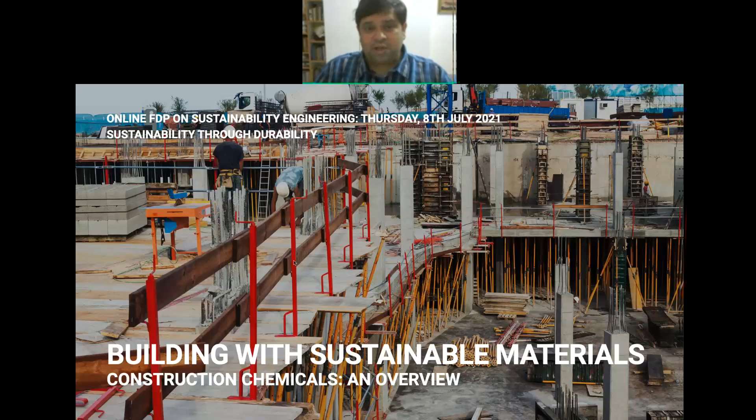Today what we will be discussing is about construction chemicals and the construction chemical industry as a whole. Because what generally our industry brings to the industry is a lot of durability, and through that durability, what comes through as an end product is sustainability. So we'll talk a lot about these concepts.

Here's my card, just in case you want to take a screenshot to contact me. Basically, I am a civil engineer, concrete technologist by profession, but for the last about 15 years I've been mostly in this line of construction chemicals, and I've seen and worked through it inside out. So hopefully I should be able to give you a holistic overview of the industry as a whole.

Going on the agenda today, I'll introduce to you what construction chemicals are, what we are about, how we add value, and so on. After that, we'll talk a little about the solutions itself - the different products and product systems, what you can do with it, and the possibilities you can apply as part of your research or as part of the solutions you offer.

So what are the solutions? I'll go very quickly through some detailing. Our industry is an expert not only in making materials, but also in telling you how to use it, how to re-engineer your structures, and how something should be applied to get the maximum life or maximum benefit out of it. So detailing is very, very important. And after that, we shall be finally concluding.

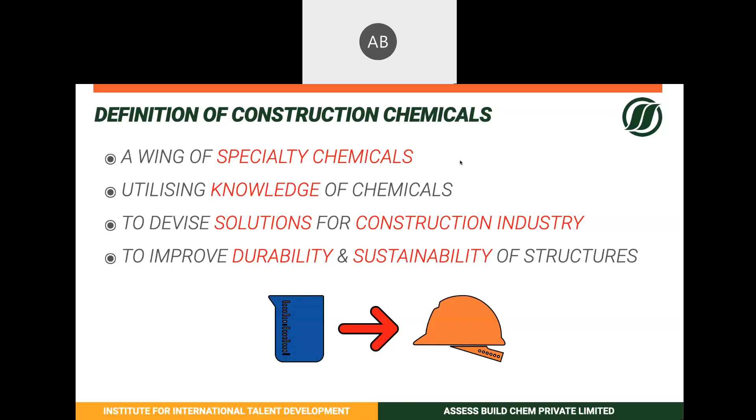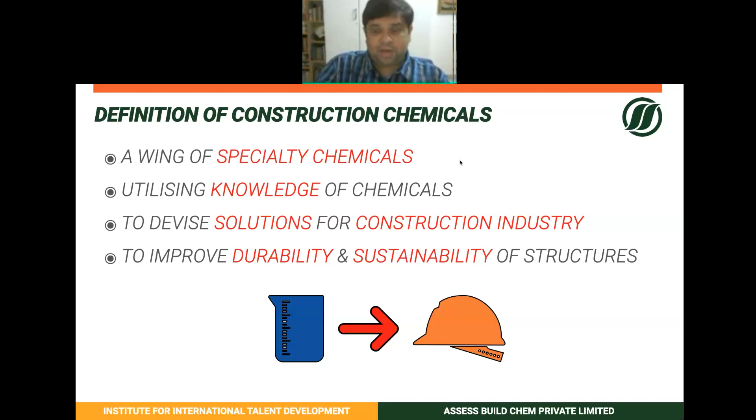Okay, so by definition, we are a wing of specialty chemicals. That means we basically come from the chemical industry, whereby we utilize the knowledge of chemicals and then devise solutions for the construction industry. So the aim of our industry is to improve the durability and sustainability of the built structure. So our expertise basically comes into three basic categories.

If we take the entire range of what construction chemicals offers, we can break it down into three broad areas. The first, of course, is concrete enhancement. This means there are additives and different kinds of materials available to make the initial concrete construction much better. How do you enhance the properties of concrete? How do you make it easier to flow, easier to place, compact, and cure? How do you improve the properties of various concretes? That's what comes under concrete enhancement.

Then under concrete repair - for example, if your concrete is damaged because people didn't use the first part, our concrete enhancement solutions, and the concrete undergoes rapid deterioration - to repair that kind of deterioration we offer different kinds of mortars, different kinds of supplementary binders, or different kinds of strengthening systems like epoxies, injection systems. So we also offer those special materials for repairing the concrete and restoring it to its original condition.

And once these two steps are over, we also provide solutions to protect the concrete in the long run. That is basically how a concrete structure will attain its value, because only once you protect your concrete properly can you assure that it's going to actually live through its design life, or have a long life, thereby generating sustainability and value for different structures.

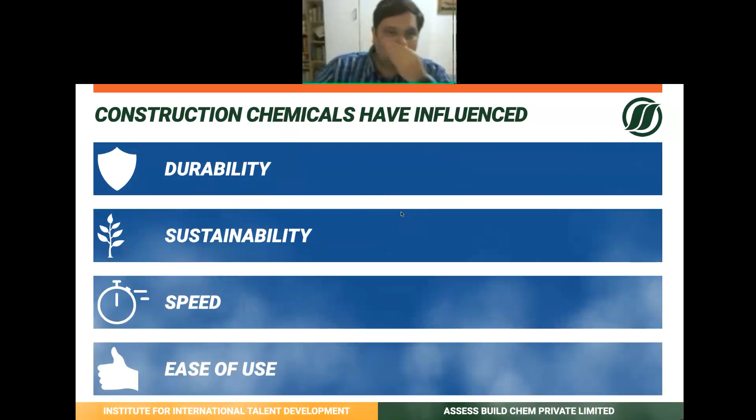If we think about it in the long run, construction chemicals have basically influenced the durability of structures. A lot of times in the construction industry, or even when talking to slightly senior engineers, they talk a lot about durability, and the discussion comes up that whatever we built in olden times, like our forts or ancient structures, look, they have survived for thousands of years. Then why not concrete?

That is something we need to really start thinking about, because over time construction has become much faster. Space is a constraint, so we have stopped thinking of expansive structures horizontally. We are now thinking vertically. So the construction systems have changed, and with all those things have come newer challenges. How to make concrete more durable for everyday application is something the construction chemical industry really works on in the long term.

The sustainability part of it also comes through very easily, or construction chemicals influence sustainability. That is because by proper use of construction chemicals, one is that you reduce the OPC content, or rather optimize the OPC content. Your structures last much longer, so you don't need to repair and rehabilitate them as frequently. So you're not spending time, money, fuel, and manpower to do that. That's how it starts bringing sustainability into it.

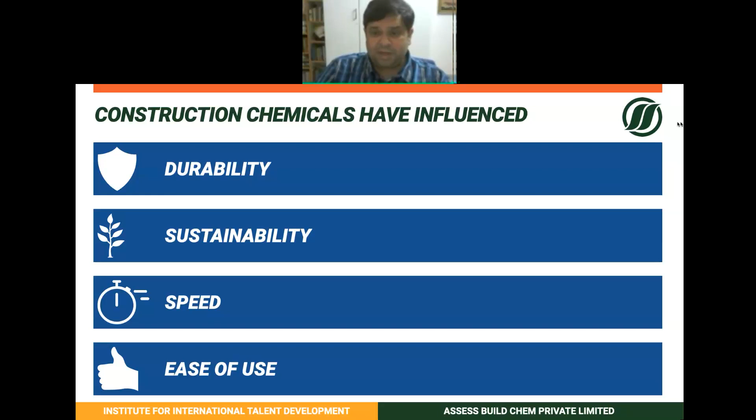Efficiency is of course one of them. It's because you're optimizing the use of different materials. So your construction overall becomes much more efficient in terms of time, in terms of the materials used, but basically in terms of the life cycle costing.

That apart, of course, the use of construction chemicals is a tremendous boost to strength. For example, your concretes today are becoming much more stronger and much more durable. And this kind of evolution has become possible only because of concrete admixtures and because of construction chemicals.

Now aesthetics is something that it also aids. For example, there are different sorts of finishes available today. When those things come from the construction chemical industry, the concrete itself becomes much more beautiful, for example form finished concrete, or exposed aggregate finishes. All these kinds of things become possible only by use of construction chemicals.

Of course, since the structures are much better and much more durable, construction chemicals really help with safety. That means there is less chance of damage, less chance of collapses, and it really improves the life. So it improves safety over a long time.

Value, of course, improves tremendously, improves the lifespan of buildings, and therefore improves the life cycle economy of structures. And last but not least, energy conservation. For example, today there are coatings available which we call thermal coatings. These coatings can reduce the amount of energy used during the life cycle of the building by almost 30%.

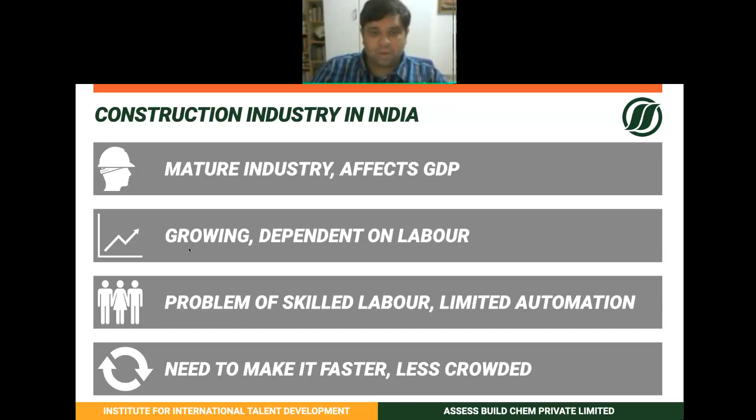To achieve economy, we need to make construction much faster, and now, keeping the pandemic in mind, we need to make construction less crowded. This is the situation today—however much we like it, we will need to maintain distancing over time.

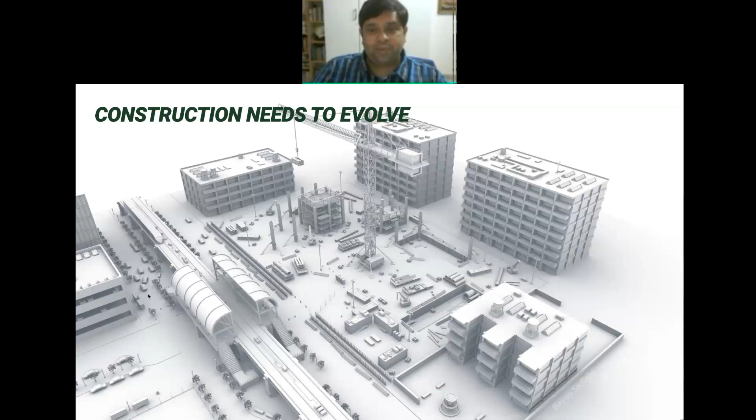Because of that, construction will need to evolve. It will need to become much faster, and it will need to maintain sufficient distance between two people. Basically, it will have to optimize the number of people employed—people cannot be working very closely together anymore. We'll need to rethink the way we're constructing and working, and make construction much more efficient and much more skilled. But at the same time, this is something we will have to keep working on.

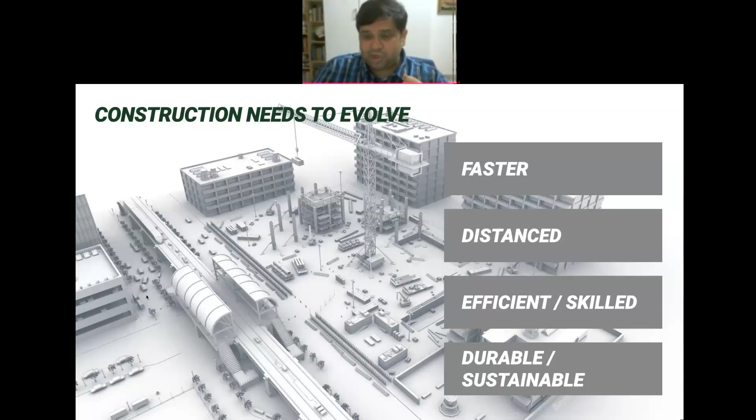Since manpower will remain a constraint in the near future, we will have to make construction a lot more durable and sustainable. Without that, structures simply won't last long, and if they don't last long, we'll have to again get people and allocate resources to repair it. So our structures need to be durable and sustainable from the word go. We need to start thinking about building better and faster, and this is going to be possible only by use of construction chemicals. So now a lot of people ask me about construction chemicals.

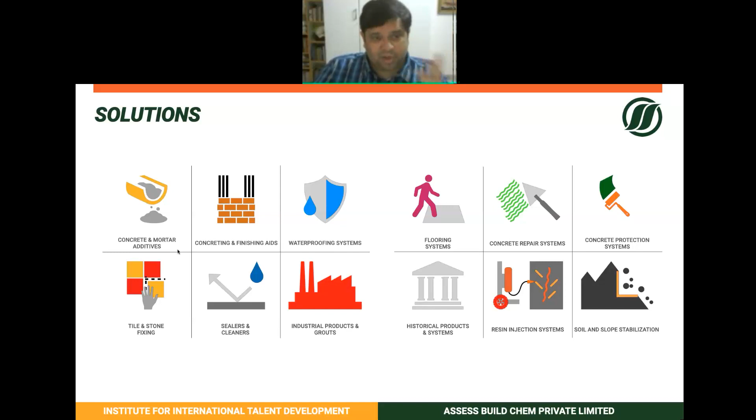If I generally ask today's cross section of the people who are attending, what do you know about construction chemicals? Most people will simply think that construction chemicals means concrete and mortar additives, like all different admixtures are construction chemicals. Yes, partly you're right, because the technology did evolve from the concrete and mortar additives. But that apart, today construction chemicals has ventured into different concreting and finishing aids. That means things like mold release agents, curing compounds, plasters and different kinds of mortars.

Then another area that most people associate us with is waterproofing systems. Of course, anything that is used to protect water from coming into your house, your building or your infrastructure is something that we normally work with. Then there are other factors which are much more architectural, for example tile and stone fixing, or different kinds of sealers and cleaners to maintain your concrete facade, or to maintain marble, granite, natural stones and things like that.

Then we also work a lot with industrial products. So what does industrial products mean? These are specialty materials that are used to anchor machinery bases. These are special materials that are used to protect industrial metal sheds, for example. Again, systems relating to industrial are floorings. Any different kind of floor, whether it's a commercial, industrial or residential building, a lot of the flooring systems come from the construction chemical industry.

That apart, of course, we are into repairing concrete. So there are a lot of special materials here, like premixed mortars. You have your anti-corrosion coatings, your micro concretes, rust converters, corrosion protection systems, a lot of those different kinds of materials, injection systems, and so on.

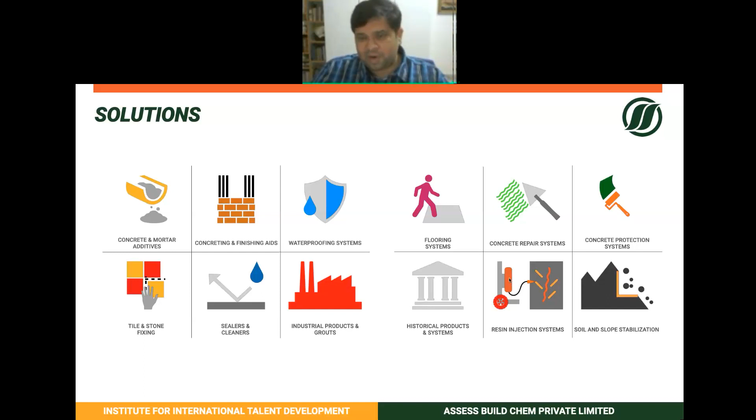There are a lot of things available. There's a whole new class of material called resins. Resins might be anything based on acrylics, polyurethanes, epoxies. I'm sure you would have heard all these terms before. A lot of these systems are today put into use for waterproofing, for repairs, for soil and slope stabilization. They're all kind of interconnected, but at the same time, we break them down into these different solutions. The aim of using all these different materials is to ensure that we get sustainable construction.

A lot of people talk about sustainability in very large terms, and we are using this term very interchangeably these days. But I've read through a lot of these things, and a simple way for me to put it is: sustainable construction is something that simply reduces the environmental impact or the financial impact over the life cycle of the structure.

By environmental impact, we mean that if we are using less cement, we are already reducing the carbon footprint. If we don't keep on repairing the structure, we're using less fuel, less manpower, and also less cement and all those things. So all these really go towards helping the environmental impact of the materials. And of course, if your structures last longer and are much more durable, then they also improve your financial impact over the life cycle of the structure.

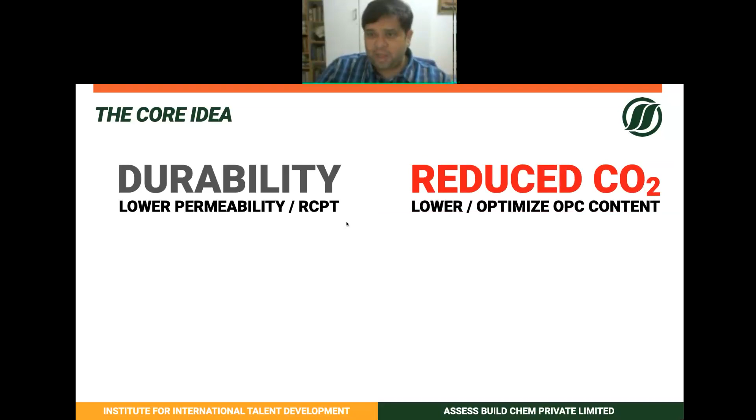So the core idea that we have to follow is how we can improve durability, how we can improve the carbon footprint, that means reduce the CO2 that goes to the environment. The third is save cost, and the fourth is to save energy. All these four core ideas can be put into place by judicious use of construction chemicals.

So right now, what I'm going to do is, over the next roughly 30, 40 or 50 slides, give you an idea of what different construction chemicals are and how they can impact construction, just to show you what the possibilities are basically. So when we talk about solutions, like I said, we work in the field of concrete enhancement, repair, and protection. So the first area that we take up is concrete enhancement.

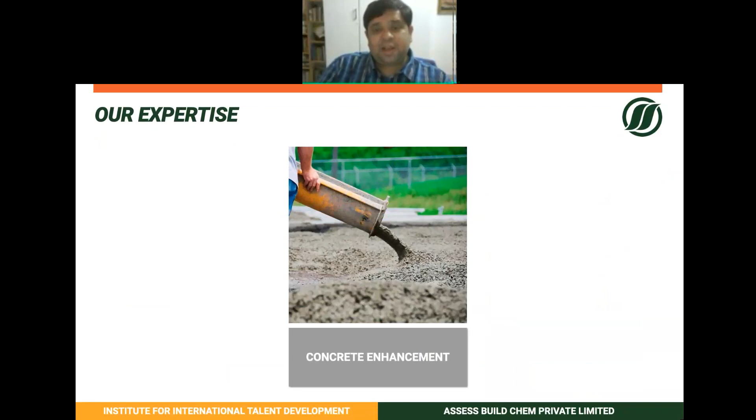Concrete enhancement means anything that you can do to improve concrete as a whole or improve its properties during its production, transportation, placement, and finishing. In our industry, admixtures or concrete and mortar additives are one of the biggest segments. It makes possible a lot of innovations that we see in concrete today.

You've all heard of, or must all be working on, different kinds of self-compacting concrete, high performance concrete, durable concrete, lightweight concrete, sprayed concrete. A lot of these innovations are possible only because of the concrete and mortar additives that we bring to construction. Basically, a lot of these additives bring speed, economy, and eco-friendliness to your concrete mixes overall.

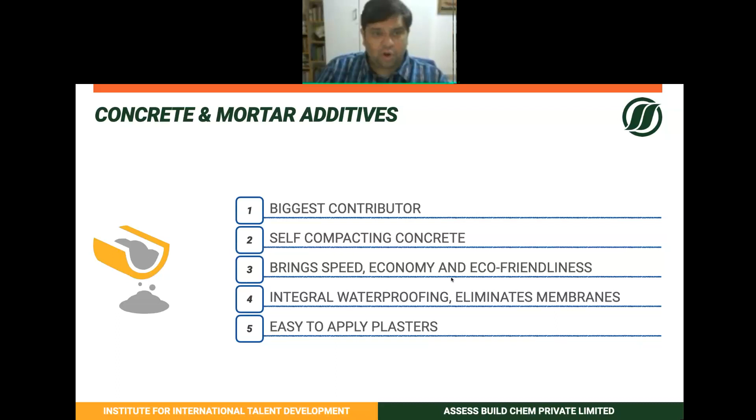For example, another area that additives go into is integral waterproofing. It eliminates the need for membranes. It simplifies construction as a whole, and a lot more possibilities are created because of the admixture technology. So if I simply put it, concrete can have problems with workability. Maybe compaction is difficult, placement or slump or its retention is difficult.

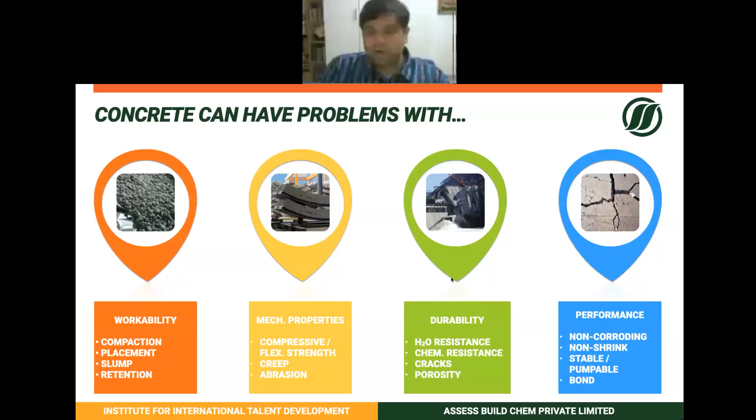It may have a problem with mechanical properties. That means the compressive strength may go lower, flexural strength may go lower. There may be excessive creep, or your concrete may be easily abraded. For example, in an industrial floor, a concrete canal, or a dam spillway, you may need to think about concretes that are much more resistant to abrasion. Those kinds of things can be a problem, but those are problems that can be solved with construction chemicals.

Of course, something that we are really fighting with today is how to get into durability. I would say, even as a concrete technologist, strength is no longer a big issue to achieve. Our cements have got better. The way that we make concrete has gotten better. There is a little problem with the skeleton, the aggregates and sand, but it's nothing that can't be handled.

But overall, something that we have to start thinking about slowly is going from a strength-based criteria to a durability-based criteria. I'm sure you, as the educators of today, are really looking to push this concept through. This needs to become mainstream in the thought process for the industry. Under durability, we look at things like water resistance, chemical resistance, cracks or porosity, and those are things that we need to address.

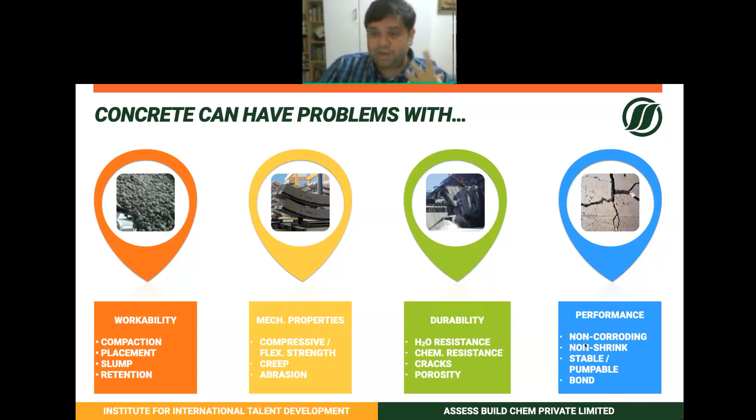And oftentimes we need special performance out of concrete. For example, concrete that is resistant to corrosion, concrete that is non-shrink, concrete that is pumpable over long distances, or in case of repairs, concrete that bonds well to your substrates. All of these requirements are solvable by the judicious use of admixtures. Again, just look at this term judicious.

That means admixtures are not like a magic liquid that you can add to concrete and be done with it. You have to see how to make all these different things work together. I'm a food enthusiast, so it is like putting together a perfect recipe. You have your main vegetables and everything, and the admixtures are simply the flavoring, the masala.

You are using it in very small quantities, but it has the potential to change the properties of your mix big time. But you also have to make sure that all the ingredients work in tandem, in harmony. So you have to use admixtures judiciously, and you have to use the correct mix design procedures. And with that, you can pretty much solve any concrete problem that is there today.

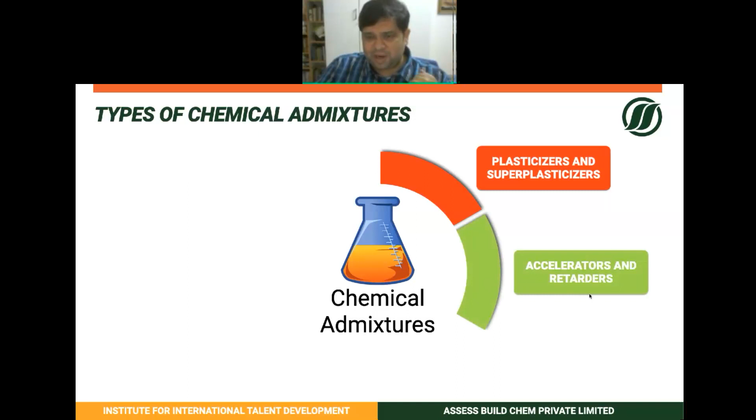So chemical admixtures, of course, there are a lot of types available. It starts off from plasticizers and super plasticizers, and there are accelerators, retarders, air entraining agents, for example. There are new generation materials in all these different categories. Integral waterproofing is something that's coming up in a big way since we are focusing a lot more on durability. This has become one of the key players in our industry today, something that really helps to improve the durability of different concretes.

We also need to think about mortar and plaster enhancers. It's not only that we use concrete, but we are using mortars for different kinds of waterproofing applications. You're using it for repair applications. You're using it for different kinds of finishing applications. So these mortars also need good properties, and that is something that admixtures can help you make better.

Then the specialty admixtures: whatever cannot be classified in here goes into specialty. So under specialty, you've got things like foam concrete additives to make lightweight concrete. You've got corrosion inhibitors. Different kinds of corrosion inhibitors are there. Different kinds of stabilizing agents are there. Viscosity modifying agents. I mean, it's a whole world.

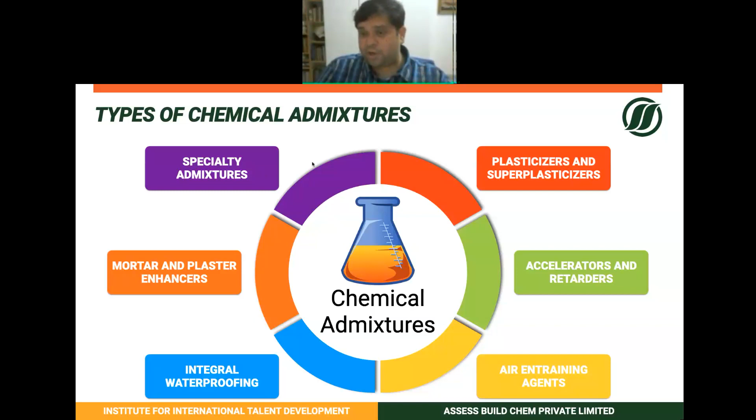Basically any property you want to impart to concrete today, it's in the realm of possibility that you will be able to manipulate the properties of a concrete like that, and that is all thanks to the construction chemical and the admixture industry. So like I said, a lot of these innovations are today being made possible simply by use of admixtures.

You can't even imagine making, say, a self-compacting concrete or anti-cement washout concrete, or underwater concrete so many years back. It was a very difficult process, but today with the right mix design and the right admixtures, all these kinds of things, even lightweight concrete, are very easily achievable.

Today you can easily achieve lightweight concrete densities of about 500 kg per cubic meter up to about 1600 kg per cubic meter, and also with a bit of compressive strength. So all these different things are possible. Self-compacting concrete is one of the areas which is really made possible only because of modern admixtures.

To give you an example, this is a self-compacting concrete made with a compressive strength of roughly 65 to 70 newtons per mm square, and this is made with barely about 180 or 190 kgs of OPC. The rest of it is a combination of different supplementary cementitious materials and fillers. And of course, there is an admixture: a high performance flow agent, a plasticizer, as well as VMA, a viscosity modifying agent.

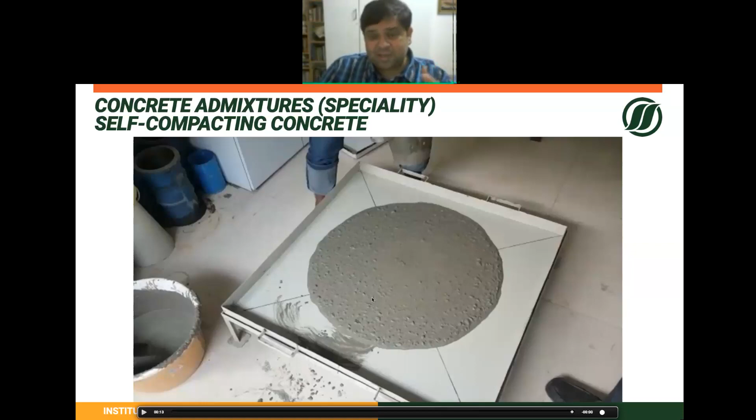And it definitely makes this kind of a green concrete possible today, something with very low OPC contents and very high compressive and durability strengths. These self-compacting concretes also actually find use in the industry today. It's not that these materials are simply made in the lab, but the Bangalore airport building or urban housing projects, they're all working on it. We actually have been working on another urban housing concept in which we are using self-compacting concrete.

We are using a thermal barrier coating for the entire external waterproofing as well as the paint part of it. And we are using the most modern aluminum formworks. A combination of these three, we found, can actually reduce the cost of each of the units or buildings by roughly about 7 to 10%, but at the same time reduce the energy consumption by 30%, and also improve the life cycle of the building by an additional 20 to 30 years.

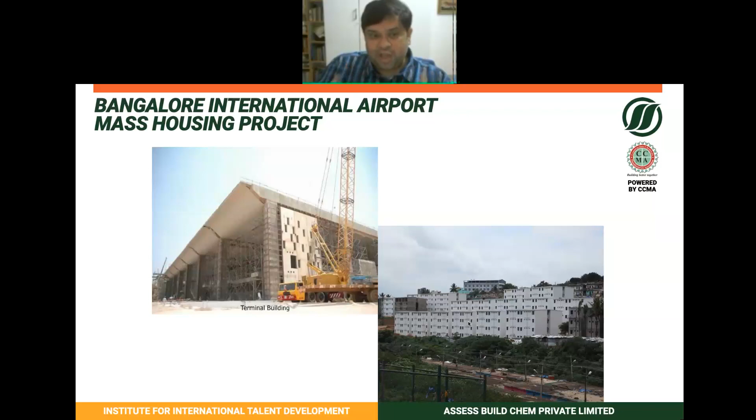So all these different kinds of challenges today can be put into reality by use of construction chemicals. Another one of the specialty lines is the integral waterproofing additives. There are some additives that simply improve the density of the concrete. So the concrete still remains hydrophilic, but it does not allow any moisture or water to penetrate through it. Then there are other solutions available which actually make concrete or mortars hydrophobic.

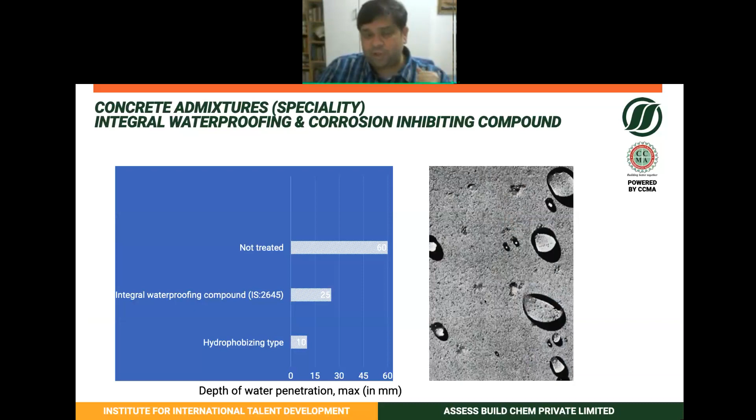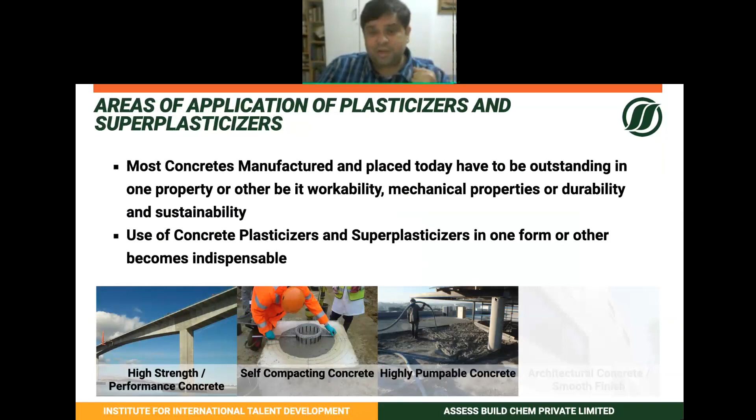So now imagine, the applications are so many. You make a basement with this, or tunnels, or canal linings with this. Then a canal lining does not need any other kind of protective coating over the long run. Or you can start thinking about acid resistant concrete, and these kinds of materials, because they lower the porosity so much, really help in achieving those properties.

Some of the key areas that have come out of it are, of course, high strength, high performance concrete. Today we're making concretes of, say, M80, 90, 100, or even up to 200. Like when I was in Germany, we used to work on really high strength concrete.

So it's about 150, 200 MPa concrete. And then we are also modifying it to give it a flexural strength of over about 40 to 60 newtons. We worked on a project casting a small pedestrian bridge deck without having any reinforcement in it. The concrete itself is reinforced with fibers, but there are no reinforcement bars anywhere in that design. So it is one of the things that might make, of course...

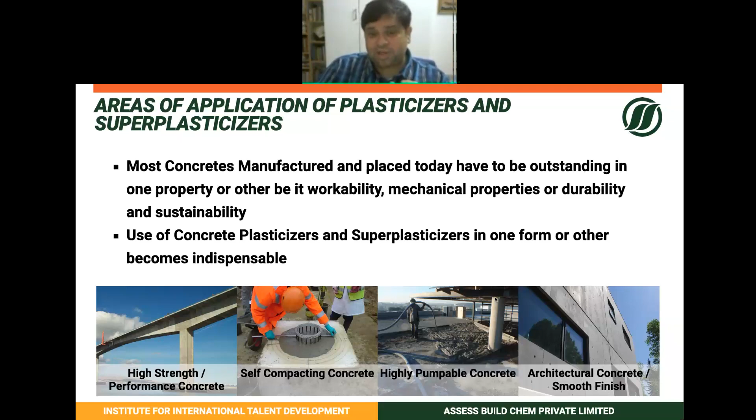You can start thinking of different structures once you've got these kinds of materials that you can make. Okay, so again, a lot more things like fiber reinforced concrete, industrial floorings, decorative concrete, chemically or acid resisting concrete, slip form concrete, fair faced finishes, and precast concrete. All these kinds of things are today possible because of plasticizers and super plasticizers.

A lot of people say, okay Sunny, how does this become sustainable, or how come you're talking about energy savings? For example, when you're using self-compacting concrete in precast units, you save a lot of energy that goes into vibrating these forms, because normally it's a big form. They have mechanical vibrators, so you save that much energy in trying to vibrate the forms.

Second, a lot of the precast industry still relies on steam curing. Today admixtures are available that increase the hydration of the concrete - it's not really an accelerator, but it improves the hydration at early ages. Because of that, you're getting demolding strengths of about 15 to 20 MPa within a day's time, and in a very sustainable way. This entirely eliminates steam curing. And once steam curing is eliminated, you can imagine the amount of electricity that goes into generating that steam - all those things are saved. So a lot of these things really help the sustainability of the concrete.

And of course, using admixtures really makes the concrete much better, because you're reducing the water cement ratio, so you're automatically improving the durability. And because of the durability, the life cycle of the concrete itself improves tremendously.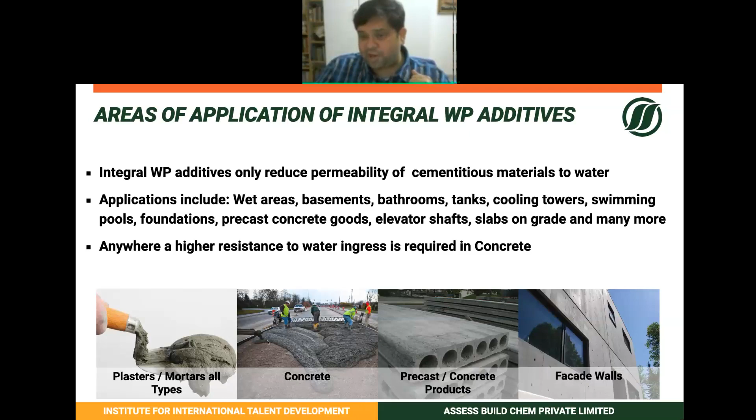Now, areas of application of integral waterproofing - you can use it for different plasters and mortars, as coverings or linings. It's a good thing to use in precast products. Any concrete, for example if you're casting any basement or any roof, or nowadays casting slip formed walls like facade walls - in all these places, imagine if you can directly add something to the concrete that makes it a lot more waterproof. Then you don't need to, over time, protect these structures. So a lot of resources are saved, and that kind of resource saving and economy is something that admixtures can offer.

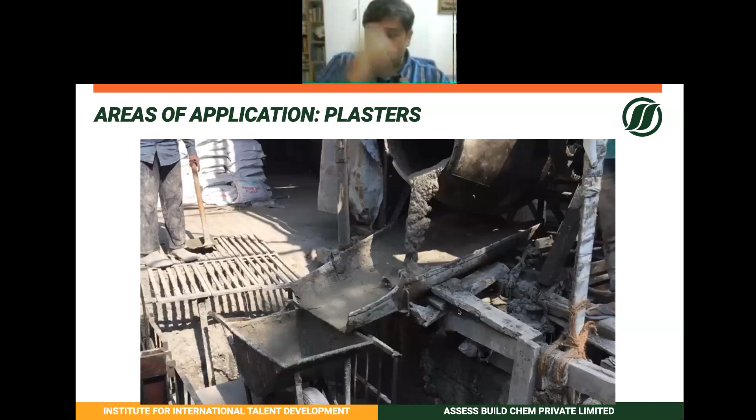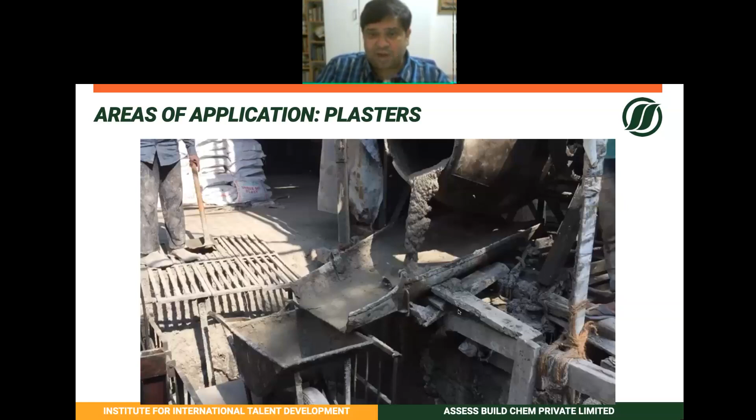When we talk about mortars also, for example, today we talk a lot about plasters, to give the building an even facade look, and to protect it, to act as a layer of protection. So the problem coming up these days in a lot of places is the availability of sand. Now in places like Mumbai, for example, there is barely any natural sand available. A lot of people know that when using crushed sand or manufactured sand, it still is not the same as using river sand or natural sand. And there are problems with the plaster - a lot of cracking, a lot of crazing, a lot of workability problems. So we have devised solutions today.

So we have devised solutions today that use crushed sand or crushed fines from your quarries, and you can make plaster that looks as beautiful as this. You can simply see it's very cohesive, made with 100% crushed or manufactured sand, and at the same time it's very light, very cohesive, very fluffy, and very waterproof. So we are combining multiple properties into one single architecture to make this possible. This just gives you an idea of how the material looks overall.

So the only thing that we needed to change for this plaster is that there were a lot of surplus particle sizes, more than 4mm. That was the only fraction that was screened. Whatever was above 4mm was removed, I mean that part was separated, but the rest of the crushed sand could very easily be used with the fines and with all the other additions or impurities as it was. And you can actually see it makes a very cohesive, very beautiful kind of plaster.

So again, that leads to more economy, because then you don't need to keep on dredging your precious river beds, for example. You don't need to get natural sand from far off places. That saves fuel and reduces the carbon footprint. So things like that, of course, become possible.

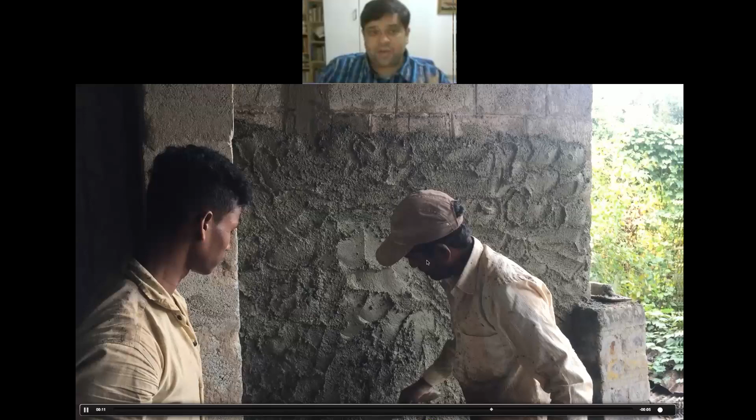So this is just another application. We actually got a mason to start using this material and asked how he feels, and he said, oh, this is as good as using natural sand. So you can imagine the kind of resources that admixtures can help you save. That part really helps in sustainability.

That apart, some of the other things that come into improvement of concrete are things like curing compounds, for example. It saves labor, it saves time, it saves water. There's a lot of things that supplementary materials like this can help you with. Today there are also block bonding mortars available, different mold release agents, and plasters available. So all these things really help to improve, I mean directly they're not applicable into the concrete, but overall they help improve the quality of concrete in the long run.

For example, in terms of curing compounds, it helps with the retention of moisture, of course. It helps prevent cracking, because your normal site curing or water curing is never that efficient. So a curing compound brings into play the efficiency that you can never have with water curing. These also seal and protect your concrete from water and UV, and prevent surface evaporation. In today's day and age of looking at sustainability, using a curing compound saves lots and lots of curing water.

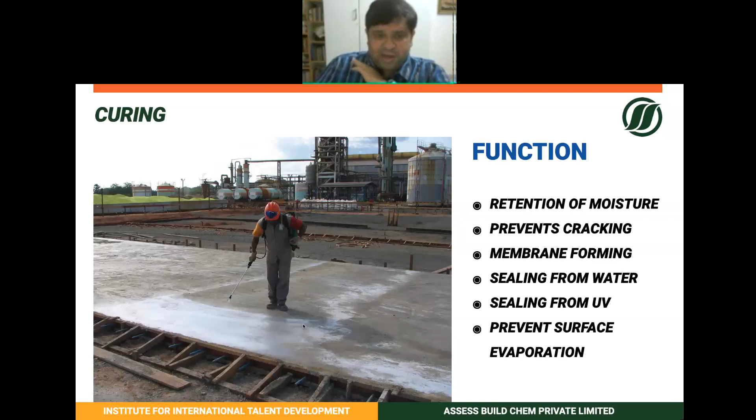So now imagine you have a large building or a large parking lot or something like that. And now to cure this whole thing for 28 days by ponding, with the evaporation, you are wasting so much water each day. Now all this water remains on the site and becomes messy. So a simple idea is simply to spray a curing compound. The application is one time, it's much easier to handle, and it's easy to quality control. So that means there's no problem with wetting, drying, and then tomorrow shrinkage and cracking. It eliminates all of those problems, and at the same time it becomes much easier.

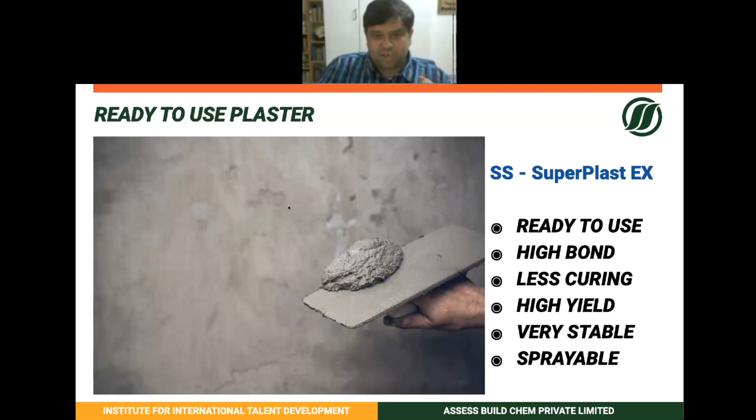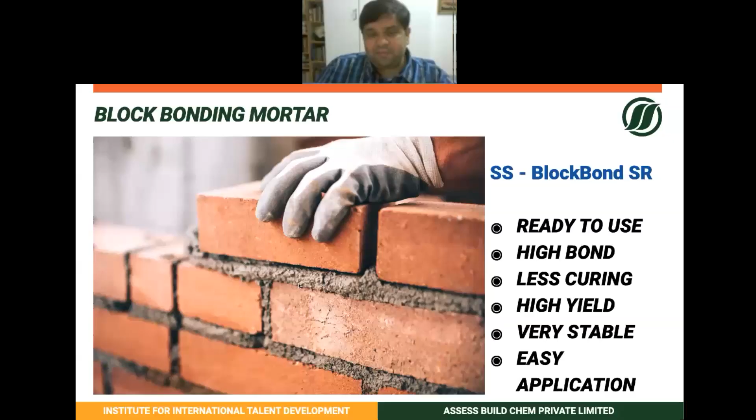So I would say, advance to solutions like this today. There are, of course, other solutions available from our industry, like ready to use plasters, which have excellent bond, need a lot less curing, are very high yield, and are sprayable, meaning you can apply them very easily. So it brings a lot of speed, economy, and sustainability to construction. You don't need to do a lot of rework. The same goes for block bonding mortars. These are, I think, a new addition to our industry.

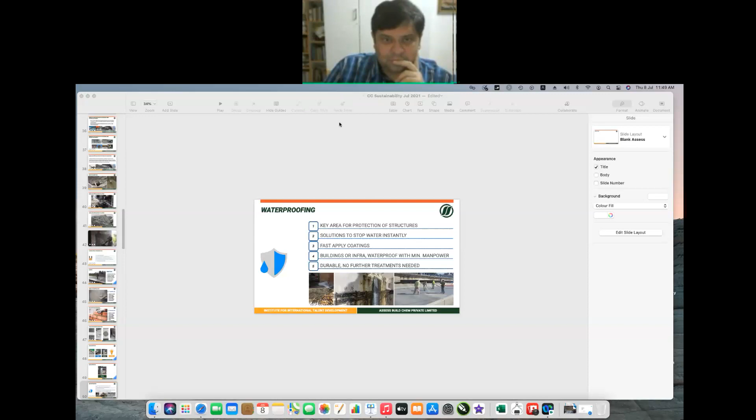Now can you see the screen at least? No, sir, not yet. Yes, sir, screen is visible now, PPT is visible, sir. Okay.

Is my full screen visible? Can you see my presentation as of now? Yes, sir, your presentation is visible full screen. It says waterproofing, key area for protection of structures, with 5 points. Can you see the video running at the bottom of the screen? Yes, sir, videos are running at the bottom center, bottom right.

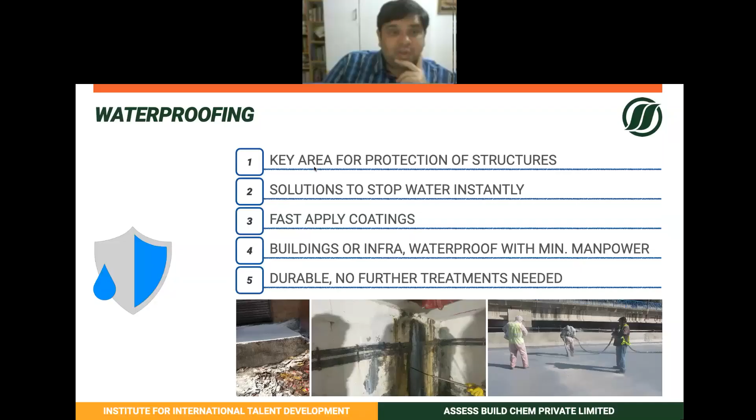Okay, fine, anyways, if it doesn't show, there's not much we can do. Video is coming now, at the bottom right. That's good. Correct, but I think it's lagging quite a bit. From the time I'm presenting to the time you are seeing it, there's quite a big lag. I don't know why it's so.

When we talk about protection of structures, waterproofing is the first thing that comes to mind, because all these systems geared for waterproofing somehow improve the density or characteristics of the concrete, or they provide a physical barrier to the elements - a barrier to water, to carbon dioxide, to chlorides, to sulfates, salts, acids, whatever it may be. So different kinds of waterproofing and protection systems are something every structure should incorporate in its construction, so that the base concrete itself can be protected.

And if the base concrete itself is protected, then automatically the life of the entire... it is only on audio mode, sorry, screen is saying only on audio mode. My screen is saying only on audio mode. No, you may carry on, sir. Carry on, sir, kindly.

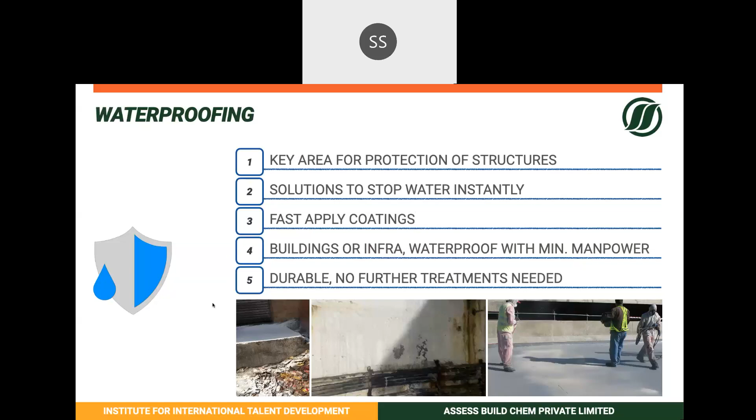Waterproofing therefore becomes one of the starting points where we go into the protection of the system. Basically, it is something geared to improving the durability of structures. As we talk about waterproofing technologies, there are many things involved - if I were to do this as a full course, it would last somewhere about 10 to 15 days. There's a lot to take into account.

But the solutions, the technology that we generally provide as the construction chemical industry, come with basic things like coatings and slurries. There are different kinds of crystallization coatings, polymer modified coatings, modified bitumens, and today new generation resins - like neoprene or acrylic resins, modified polyurethanes, polyureas. And then there are also preform membranes that we offer, and lastly the integral waterproofing that we spoke about earlier.

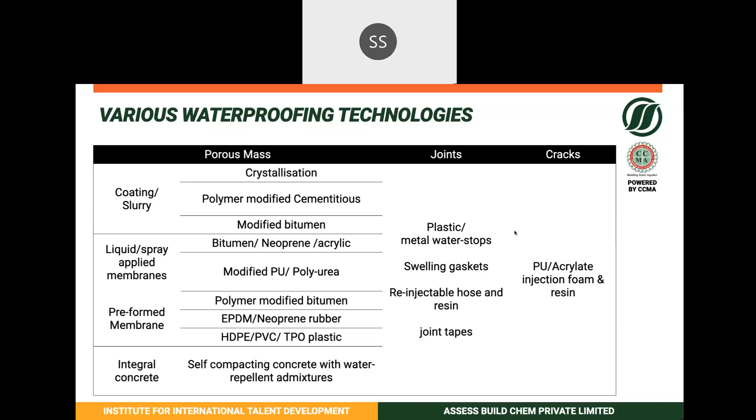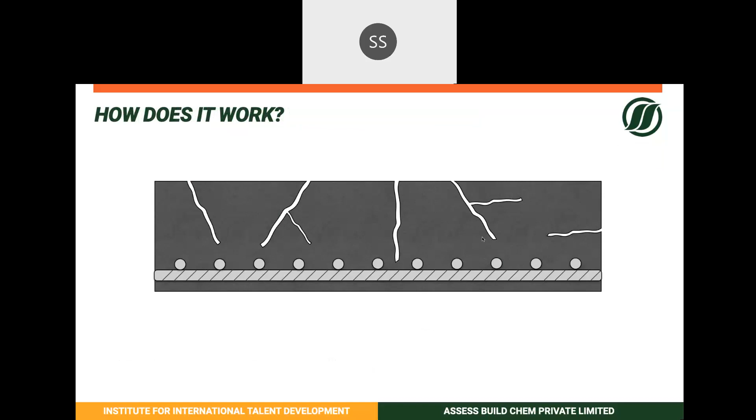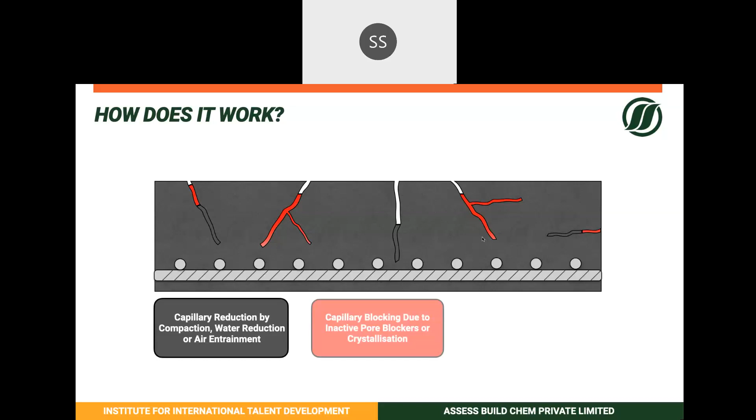So these solutions take care of the concrete itself - they protect the concrete, they take care of the joints, and there are technologies based on polyurethanes and different resin systems that can fill up cracks, thereby improving both the durability and the life of the structure. Our basic integral waterproofing additives really help reduce the permeability of the concrete itself. They work on the principle of capillary reduction or capillary blocking due to crystallization, or inactive pore blockers, and some of them also make the surfaces very hydrophobic.

So a combination of a lot of these different kinds of materials that we add into one admixture will really help. Now here is another video - it will show you the possibilities of using, say, an injection system. Is the video visible to you?

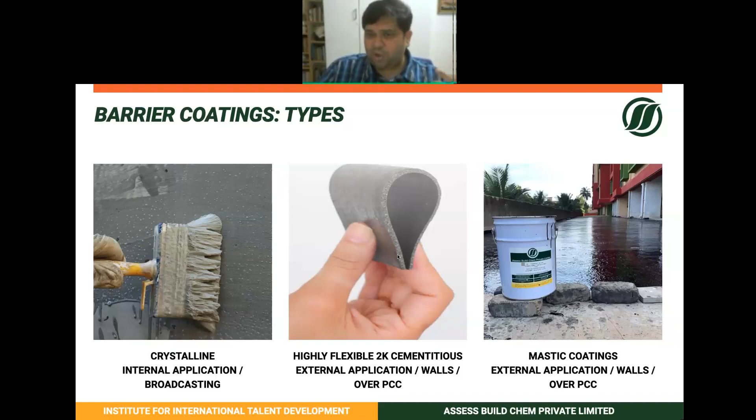So now, in case the performance of this material is not enough, there are today mastic coatings available. These coatings are based on polyurethanes, acrylics, or polyureas. There's a wide variety of these liquid resin systems, and with those you can handle pretty much any different type of waterproofing challenge.

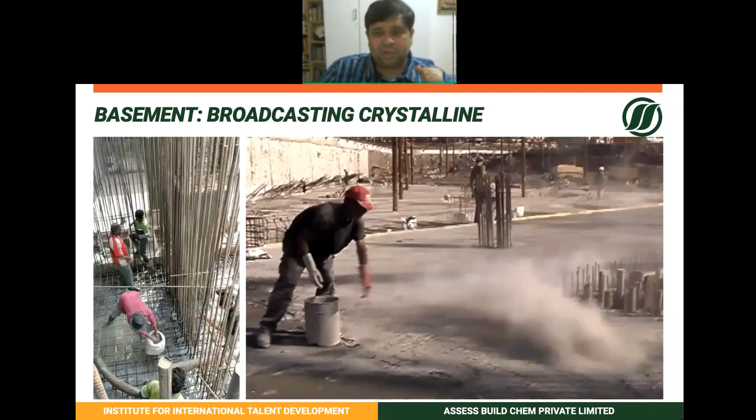Now, a lot of time people ask me, okay, how does this crystalline thing work? Mostly it is simply by broadcasting. I don't know if the video on your left is visible—but something as simple as just sprinkling this material below your raft, and then casting the concrete on top of it, can actually help prevent seepages into your basement.

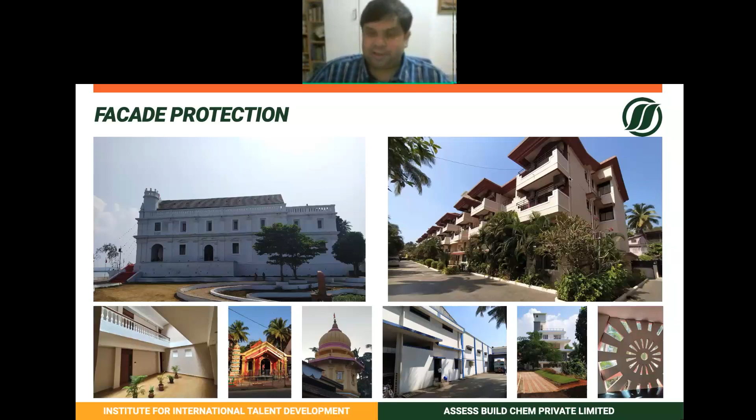That apart, we are also looking at different kinds of facade protection. There are different coatings available to treat facades themselves—these can either be hydrophobic or other coating types, and they come in different colors. A lot of these materials are not basically paints, but really help protect your waterproofing and help protect your buildings against water, against carbon dioxide, against chlorides, and any other aggressive media you can think about.

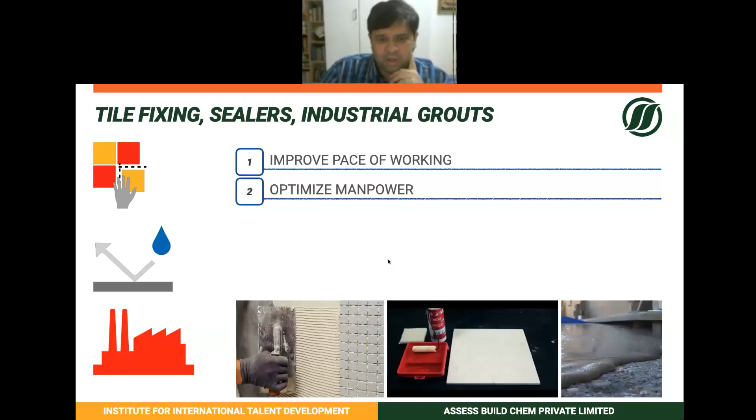Another area that we normally offer is a bit more architectural in nature, so things like tile fixing and sealers. For example, sealers are for when you have a marble substrate or something like that and you need to protect it. Marbles, granites, other different natural stones in old buildings. Those kinds of things are available.

How do you make your structures more aesthetically pleasing? If you're using these stones or tiles to improve the aesthetics of your structure, then you can definitely use these tile adhesives, because they improve the pace of working and optimize the manpower. There is no rework, and therefore a lot more sustainability and durability for your structures.

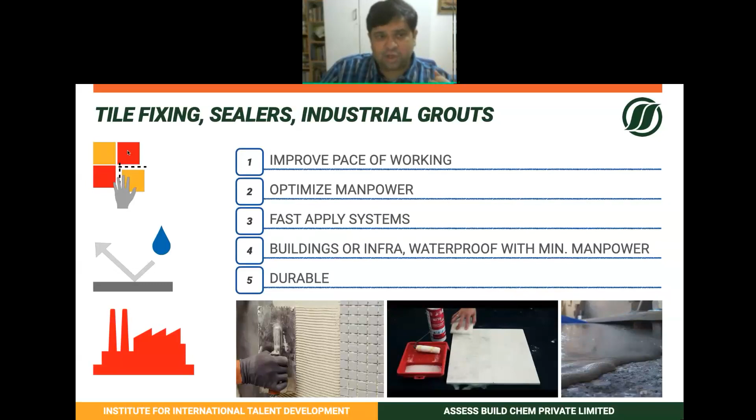All these materials, like your tile fixers and your sealers, basically behave like another waterproof coating, which is why they also improve the durability of your structures. You can use them on various applications: floors and tiles, tile on tile inside swimming pools, wall cladding, industrial buildings. You name it, and you can do an application there. Like I said, it functions as an additional waterproof layer, which helps the durability of your structure.

Then this is another area which is coming in: water repellents like these sealers. They're hydrophobic in nature. Any type of concrete or stone, if you coat it, you can get a hydrophobic effect on your substrate. That also helps protect your concrete or stone against water, wear, and weathering, and thereby improves their durability.

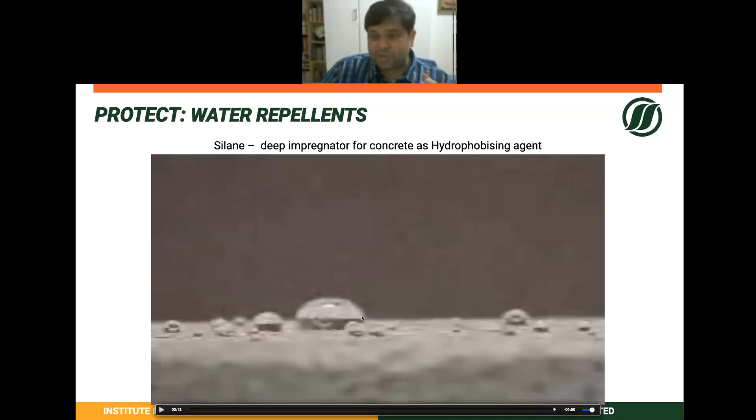Structures like the Lotus Temple, for example, have used this kind of protective measure, and you can still see the effects. I think these coatings are renewed every 2 to 3 years, but it has helped it maintain its facade over so many years, and it still looks beautiful.

The other things available from the industrial range are grouts. Any time you want to anchor or use heavy machinery and build its foundations, your typical concrete might not work, because typical concrete has the tendency to shrink, then crack, and it doesn't perform the same under vibratory loads. That is why our industry came up with a product line called grouts.

These grouts are extremely strong mortars. The minimum compressive strength of these grouts is over 70 MPa, and they have very high flexural strengths, in the vicinity of about 10 to 12 MPa. They pretty much don't shrink, which is why they're called non-shrink grouts. These really help you secure your foundations over the long run.

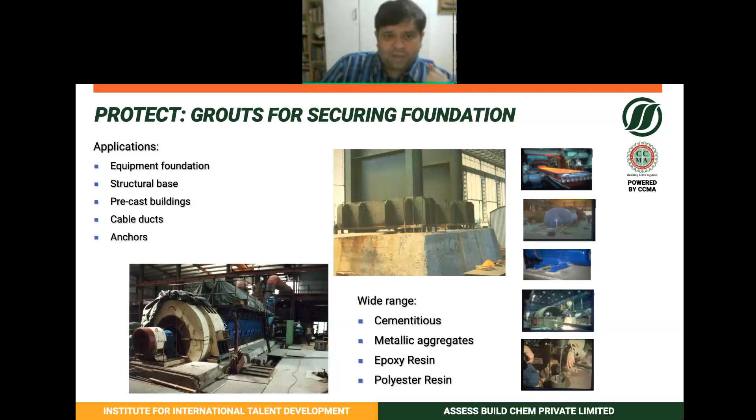After that, the final step is the concrete protection system. These can be hydrophobic in nature, or machine-applied anti-carbonation coatings, for example. What we have seen in practice is that these coatings were designed primarily for infrastructure like bridges, cooling towers, and tanks under very aggressive conditions, but they can also be used in buildings. The coating itself lasts for more than about 15 years in practice.

For 15 years, it will protect your building from cracks, from UV, from water, from carbon dioxide, chlorides, and any other pollutants. The life of the coating itself is over 15 years. Even after 15 years, you simply scrape it off like old paint, redo the coating, and you're back to square one.

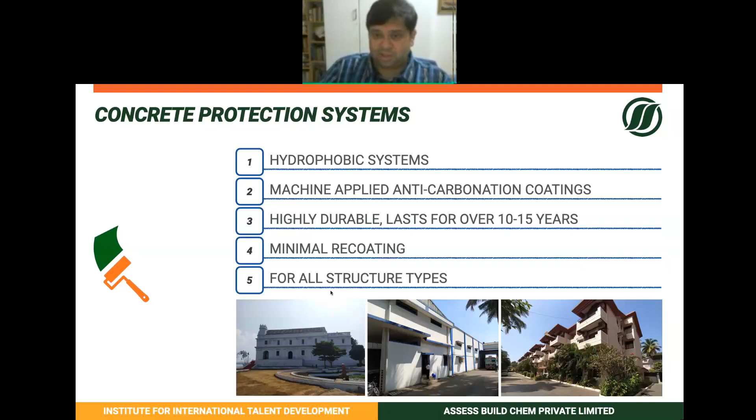The main point is that it will arrest the deterioration of your structure in status quo. Once you put the protective coating on top, any further deterioration stops almost immediately, because your concrete and its reinforcement no longer have access to carbon dioxide, water, or chlorides. With these three main aggressive influences out of the picture, your concrete remains in a protected, status quo state for as long as possible. So it helps improve the life cycle of your structures in general.

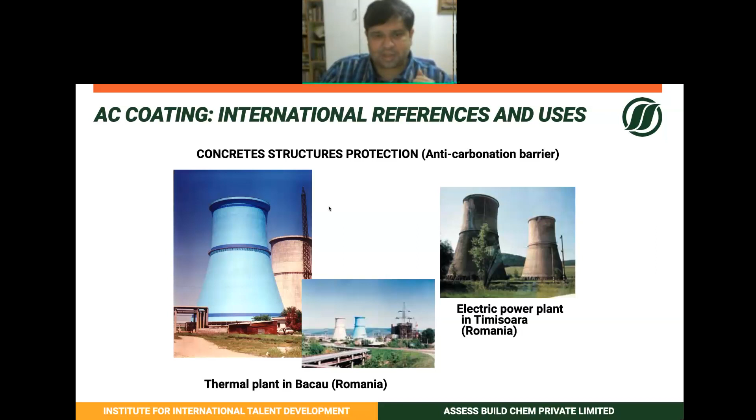We have used these for a variety of different applications. We do it on the outside of water tanks, and we use it for bridges, foundations, and cooling towers. You can see here some examples of cooling towers. We are now doing a lot of silos with it, both here in India as well as outside.

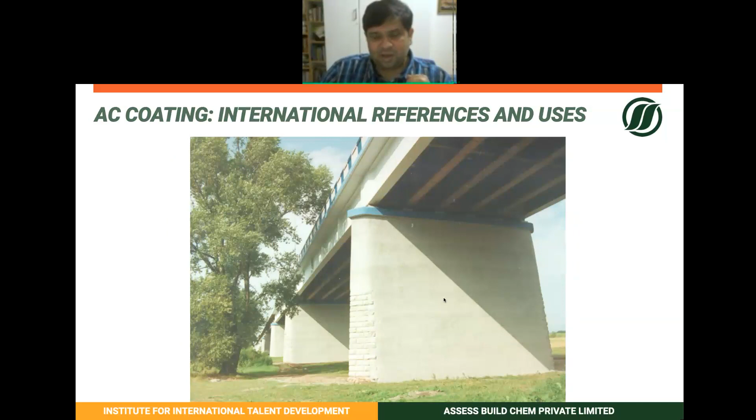So it behaves both as protection and as decorative protection. That means it behaves like paint because you can get it in color, but at the same time it really improves the durability of those kind of structures. You can use it for industrial structures, even for heritage structures like old temples or churches. We have now started using this for really a variety, and basically it looks to improving the life cycle of structures. So the last part that we talk about in terms of our basic divisions is concrete repair.

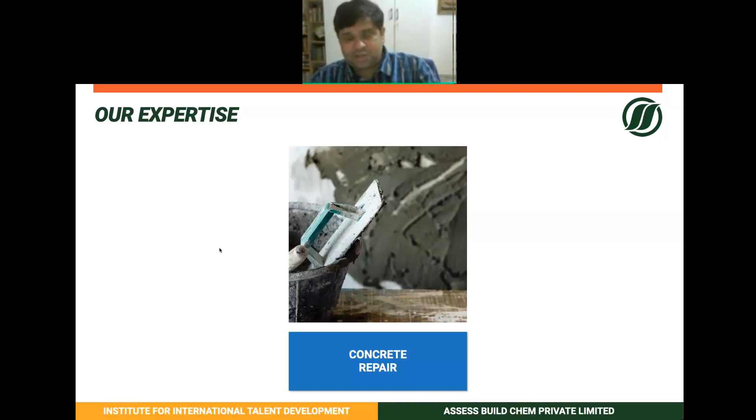So under concrete repair, one of the things you can do is flooring. So basically, anytime you have concrete and it needs a certain degree of protection or repair to make it last longer, different flooring systems definitely help you out. Part of the flooring systems also go into the protective coatings, because they are epoxy or polyurethane or polyurea based floorings. They're all part of protective systems. But the others like dry shakes or things like that are part of your repair or your new systems.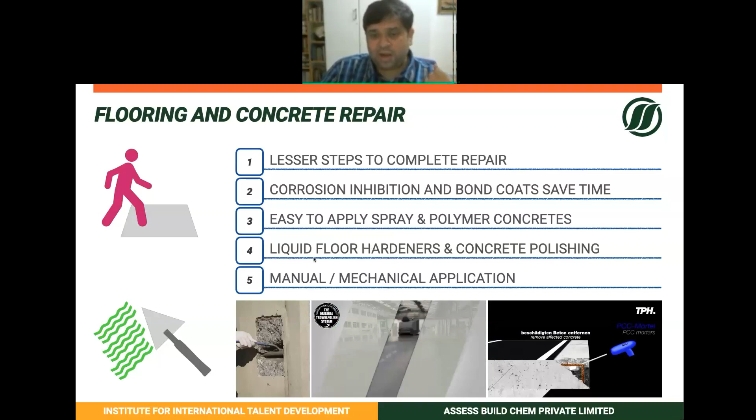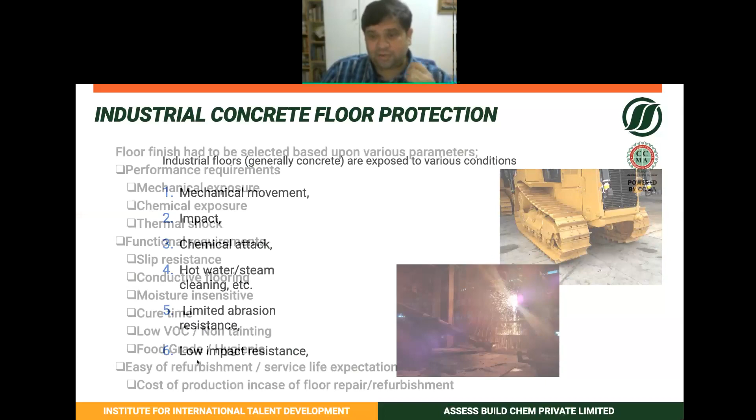So basically, with this, you need fewer steps to complete repair. Your corrosion inhibition and bond coats help save time in your repair process. Easy to spray and apply polymer concretes, liquid floor hardeners, concrete polishing. All these kind of solutions today are durable solutions that are possible only by use of construction chemicals. So if you enhance your floorings with construction chemicals or with our materials, it gives a lot of resistance to mechanical movement, impact, chemical attack, abrasion, and different kinds of heavy duty traffic. So I'm not really getting much into it.

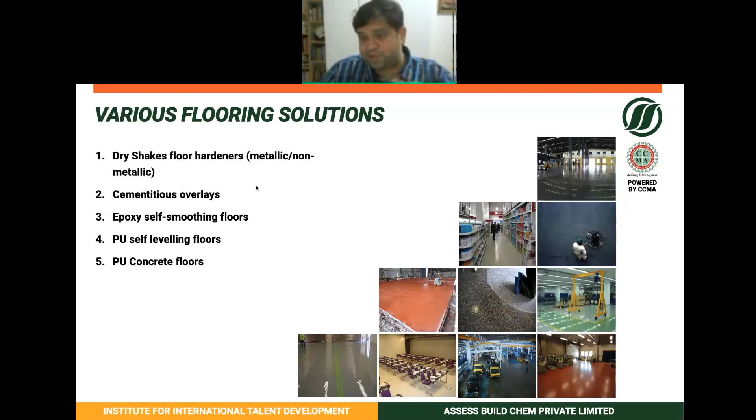But what we offer essentially are things like dry shake floor hardeners that help to improve your basic floor. Then there are cementitious overlays and repair mortars. So for example, if your floor is damaged, there are special solutions for that. There are epoxy self-smoothing floors, then different kinds of PU coatings you can do. And then there is also hybrid flooring. So if you need flooring for warehousing, for malls, for commercial areas, or for residential areas, our industry can offer specific solutions for specific applications.

So now, for example, your building has already started deteriorating, and you need to get into the repair process. After you remove all the damaged concrete, what you'd see inside is your corroded reinforcement. So how do you stop the reinforcement from getting damaged further? In that case, you use different kinds of corrosion protection systems. These can be mineral systems, that means a cementitious type of powder that you can mix into water and use.

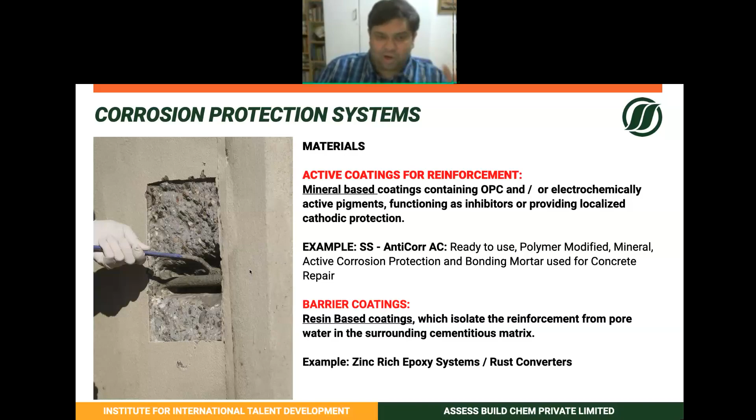Or you can use different kinds of resin-based barrier coatings, which can be based on epoxy, or a rust converter, or different technologies that are available. So you can very easily these days protect your reinforcement from further corrosion. You just prepare the surface of the reinforcement and simply brush apply these coatings, and it protects the reinforcement from any kind of further damage. So it is a must. I know a lot of people in India don't use this or use a wrong rust remover, but what's really important is that you use a corrosion inhibitor. That will actually help you to save your structure.

So anytime that your structure is damaged and it is spalled off, and then your reinforcement is exposed, your reinforcement will keep on corroding till it's almost gone next to zero. So in that case, you do need to take care of your structure. So simple things like surface preparation really help. Surface preparing the concrete, preparing the surface of the reinforcement, like removing all the rust, cleaning it up.

That really helps. After that, you go in with a corrosion inhibitor coat to protect your reinforcement itself. Then you go with a bond coat on your concrete so that the new mortar or the concrete replacement can bond very well to it. And after that, you simply go in with one of the reprofiling solutions. So it can be a polymer mortar, like I said, a spray applied mortar, micro concrete, whatever it is.

So all these materials are available in different strength grades. For example, if you want to repair a concrete of M40, there is no point in repairing it with, say, a micro concrete that's M80 or M100. So you get these in different strength classes to meet your structure, so that they all behave in the same way, and the solutions are possible. So that is as far as repair goes.

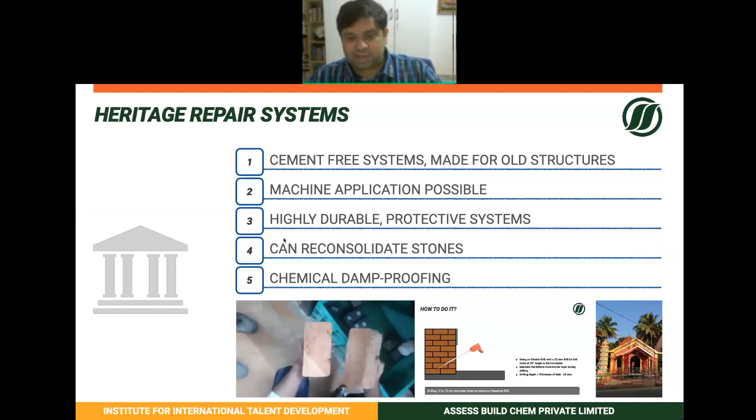Slope stabilization is a big challenge, especially when you're trying to do tunneling or constructing in the hillside or things like that. There is tremendous difficulty in trying to get slopes stabilized. In earlier times, slope stabilization with cement grouting or something used to take big machinery. You had to get silos and silos of cement, work with big machinery to inject it, and really huge drill rigs to drill the holes into the ground. So all those kind of things were there.

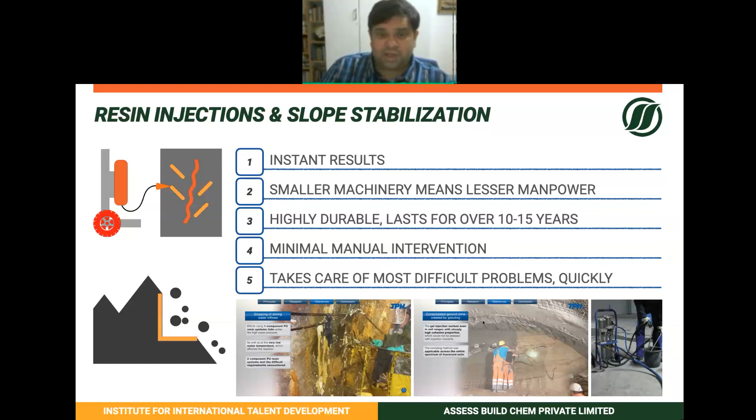To give you an example, I was talking earlier about one of the projects on the dam. In that entire project, to stabilize the entire drainage gallery, which was about 400 meters long, all it took was a team of 4 people with one of these pumps you see on the bottom right. They could do the work in barely a day or two days, and you could see the result instantaneously, and the rest of the operations carried on. So with things like that, it basically opens up a lot of opportunities.

This next one is also about slope stabilization, but it's a very interesting video on how you can stabilize dikes and dams, the small dam structures that you have. Oftentimes, because of rain and because of ingress, they tend to flow away over time. But today, with these resin-based systems, you can very easily solve these problems with very minimal intervention.

So it's interesting, but can you view this video? Is it working? It started in the beginning, but it's not moving. The photo is still, it's not moving. Anyway, it started a bit in the beginning. Okay, I'm not sure why, but anyway, there's not much we can do about it. No issues. Let me think. I may make you the host. Maybe that would enable you to do something.

No, it's okay, I'm almost done with my presentation, so it won't matter much, because these are some interesting things. It gives you a very visual idea of the kind of things construction chemicals can do, and that's why it becomes very interesting to watch.

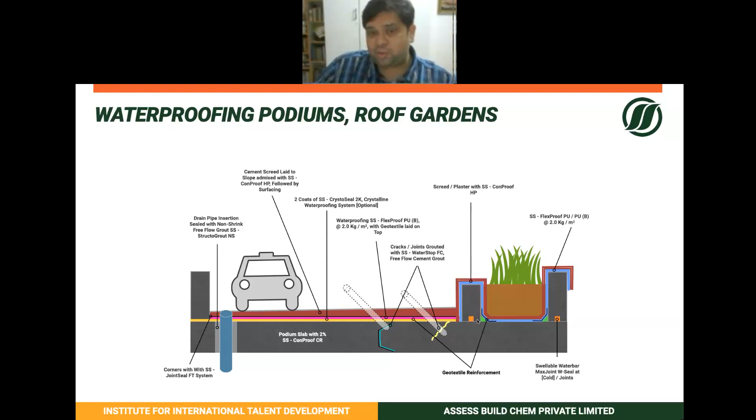But anyway, the next part we talk about is a lot of the detailing. It's not only enough that we give you different materials or admixtures and say this does this, this does that, and so on. Another part of our expertise is knowing how all these different materials integrate into your construction system. So whatever it be, even if you're talking about waterproofing, our material component might just be this one coating at the bottom, but I tell you exactly how to handle your joints, how to treat your cracks, how to detail your parapets, and if you need other supplementary materials here and there, we work with it. In the end, what we are geared to offer you is solutions.

So basically, we will tell you or show you whatever different things you need to do with our materials and with your existing setup. That means, in terms of concrete, for example, if you say I've got only this sand available, I've got these aggregates available, I've got this cement available, and this is what I need to achieve, the construction chemicals guys like me will come and work with you and say, okay, you've got this, you've got this, no issues, and we'll still help you make a workable, durable, and sustainable concrete.

So it's not only that we know what our materials do, but we also help you detail on how to use these materials more efficiently, how you can build better so that overall the durability and the sustainability of your construction lasts long. A lot of this detailing is something that we often work with you on. I just wanted to run through it, all these things are there.

For example, on how to do basements, both from the point of view of proper construction practices to waterproofing it properly, that is something that we, as construction chemical manufacturers or as part of the industry, help you to achieve.

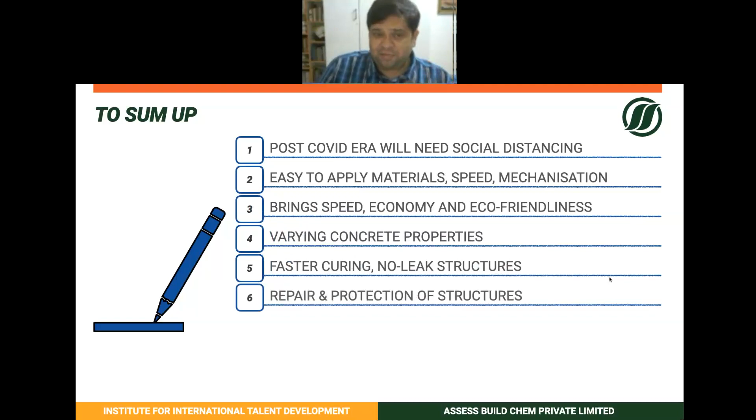So basically, to sum up, construction chemicals, of course, is a wide field. It's not very new. We have been in this line in India for over 30 years, so a lot of these materials are definitely not new. India is a mature market for us.

But at the same time, what we still see, like I'm also part of another organization called CCMA, the Construction Chemical Manufacturers Association, and basically what we are still seeing is that people's understanding of construction chemicals and how a lot of these different materials work is still very rudimentary. So as part of this organization, we work a lot on training the people, on these kinds of seminars and webinars and things like that.

We are working on some handbooks. We also collaborate with other professional organizations to write other handbooks. For example, with the Indian Bridge Management System, which is an NHAI project, we are working on writing a book or writing codes of practice for repairs. With the Indian Concrete Institute, we are writing a handbook for waterproofing, and again with the Indian Concrete Institute, handbooks on how to use admixtures properly, and many more different kinds of things in which we are involved.

We also work with a lot of your BIS codes, for example your entire CED 2 for concrete or CED 41 for waterproofing. So we are very active in that, to make sure that the latest technology and the latest innovations are coming to India in terms of construction chemicals.

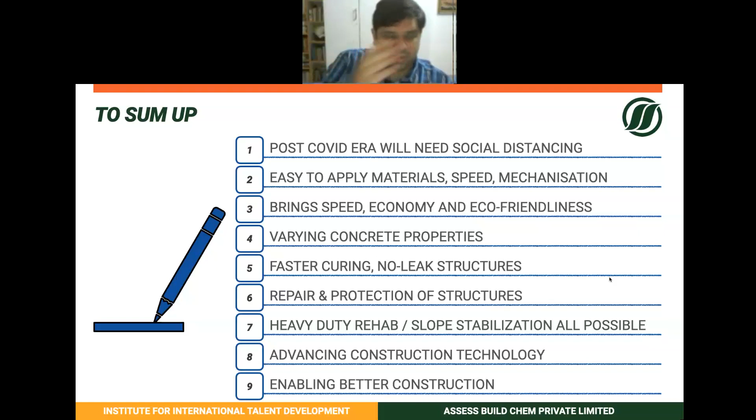Of course, repair and protection is something that we can always help with. Heavy duty rehabilitation, slope stabilizations, all are possible with minimum intervention and with a high degree of confidence. Oftentimes it's also seen that somebody does slope stabilization or simply mechanical methods, and those are not working. So if you mix mechanical methods with construction chemical based solutions, then the solutions last much longer, or the slopes last much longer.

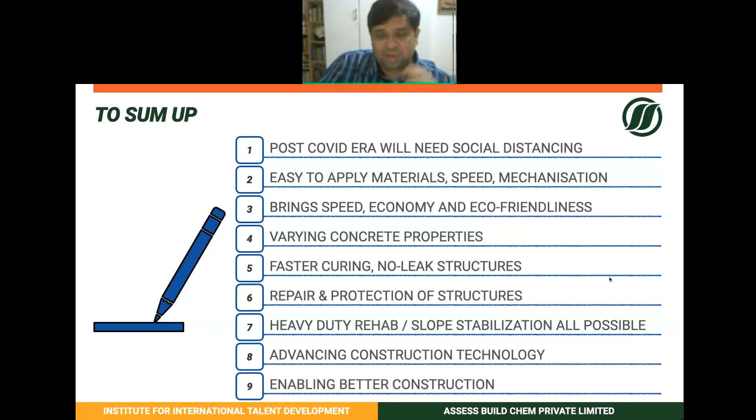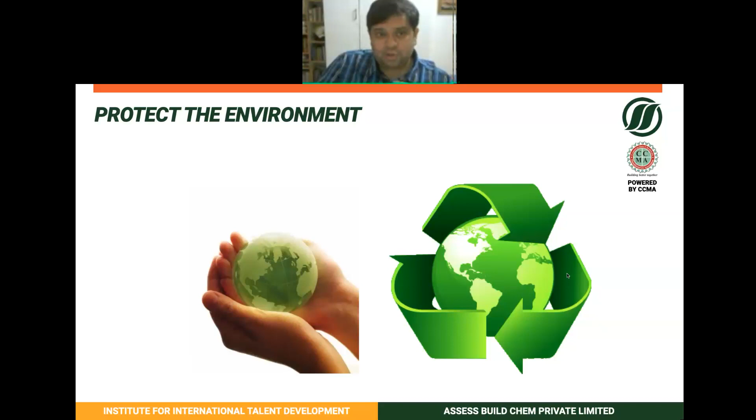So basically, through all of these different fields of activities, we help in advancing construction technology and enabling better construction. With that, I would say we really look to protect the environment. Our motto for the entire industry remains sustainability through durability, so because of that, the environment stays protected over the long time.

And with that, I would say thank you very much for your patient listening.